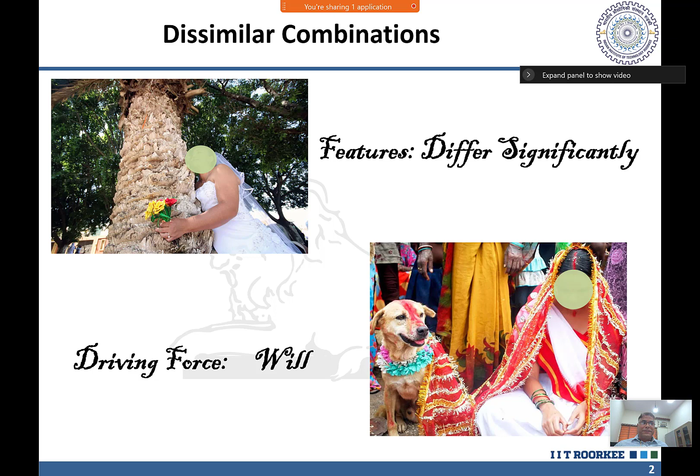A similar situation comes across in our industry, where we have to bring together two different kinds of things which are not compatible with each other. Still, we need to put them together so that we can make systems which are economical, efficient, and which can survive to the design life without failure.

So there are two aspects we can consider. One is the thermal power plant, where we see a lot of dissimilar metal combinations of carbon and alloy steel welded with austenitic stainless steel.

As fuel consumption prices keep rising, efforts are being made by the automotive sector to cut down the weight of automobiles using hybrid materials, wherein alloy steels are joined with a number of other materials, including aluminium. The joining of aluminium and steel is a comparatively newer thing, but it is being done in a lot of latest advanced cars nowadays. The idea is to cut down weight and make the systems more robust, so that fuel consumption, emissions, etc., can be reduced.

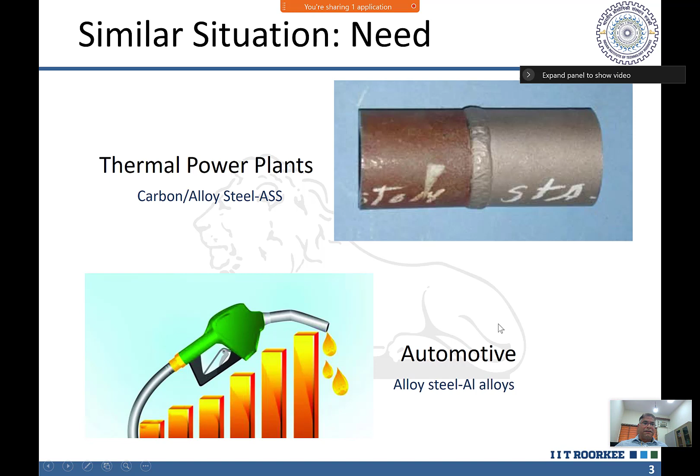When we talk of bringing two different metals together, there are a lot of challenges brought in by the difference in thermophysical properties, especially melting point, thermal expansion coefficient, and thermal conductivity. These three properties bring in an asymmetric weld whenever we apply fusion welding.

The same situation occurs in some solid state joining processes. Similarly, the difference in mechanical properties of the two metals to be joined, in terms of yield strength and ductility, leads to localization of residual stresses, which in turn frequently causes cracking and distortion.

Likewise, the difference in their chemical affinity to gases leads to different compositions, creating different situations that promote defects and discontinuities in the weld joints.

So what we basically want is, ideally, for the two dissimilar metals to be joined without doing anything extra—just put them together. If the joint develops, that's the best situation. But we know that's not workable; it doesn't happen that way.

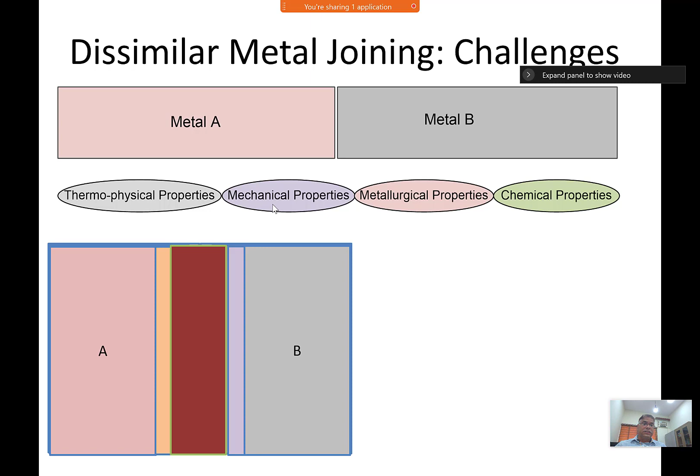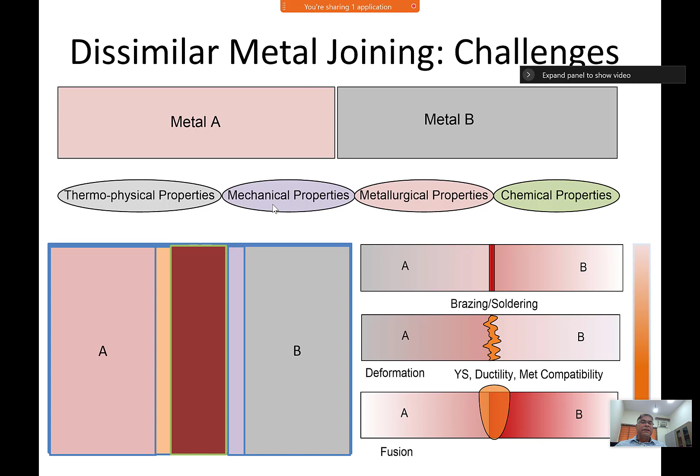Why does this happen? Because as we increase heat input, the two metals, which are not really compatible with each other, create a lot of troubles in both the weld and the heat affected zone.

When this is done, it's a very simple thing to observe—we see an asymmetric weld. The weld is very limited on one side and more on the other side, and this is attributed to the difference in properties of the two metals being joined.

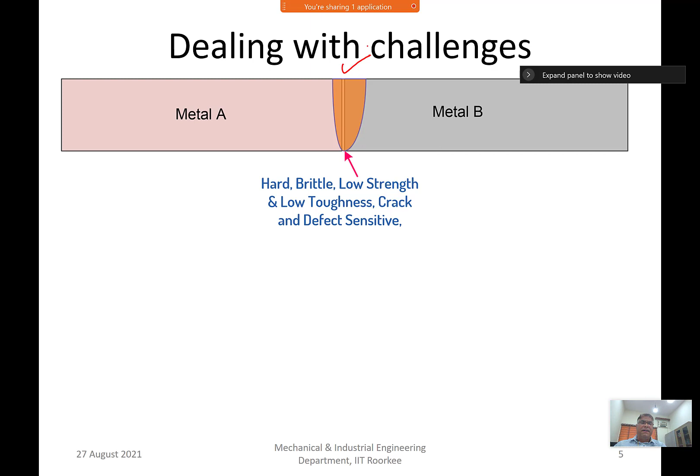When it is done directly, as in autogeneous welding, we see a hard, brittle, low strength, low toughness, crack-sensitive weld is formed. So what we can do is avoid the two meeting too frequently with each other, or reduce their direct connectivity and interaction.

So we have certain ways to address this. One is to reduce the heat input.

Second is minimize the direct interaction between the two. Third is let us increase the compatibility between the two dissimilar or incompatible systems. So for that, we have to reduce the heat input by using high power density processes like laser or electron beam, or pulse GTAW, pulse GMAW, keyhole TIG, CMT, etc. There are certain variations.

Minimizing the interaction is also possible when the two metals being joined are not getting fused with each other, as in solid state joining. There we are reducing the heat input, as well as their direct metallic interaction, since there's no fusion. So that's another alternative way to do this.

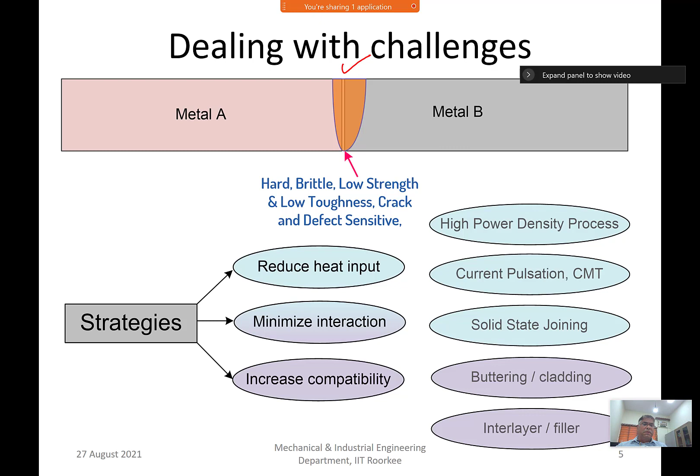Then increasing the compatibility between the two incompatible metals. For that, we try to do buttering or cladding and use interlayers. So that's what we can see in this slide. Here, the two metals A and B are not compatible with each other, so a third metal is brought in which is compatible with both A and B.

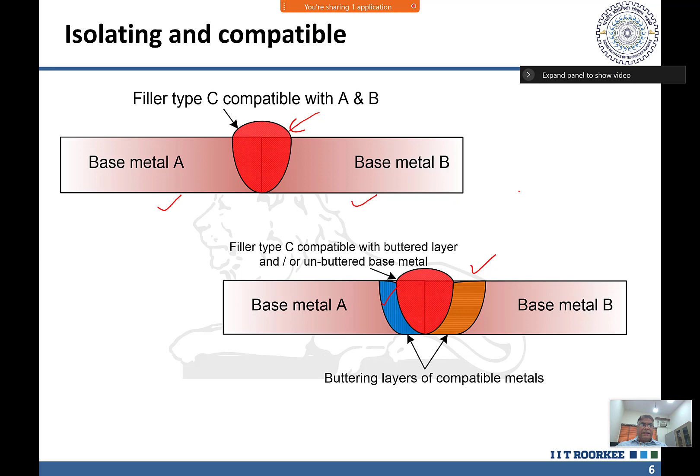But sometimes we come across cases where the filler C and metal A are not compatible, and the filler and the base metal are not compatible. Then we have to bring in more fillers used as buttering layers on both sides. So the idea is we are isolating the two incompatible metals that still need to be joined, or we make them compatible by isolating first and then joining using more compatible metals and filler. You know that the two metals have different physical, mechanical, and chemical properties, so they will not behave in the same manner.

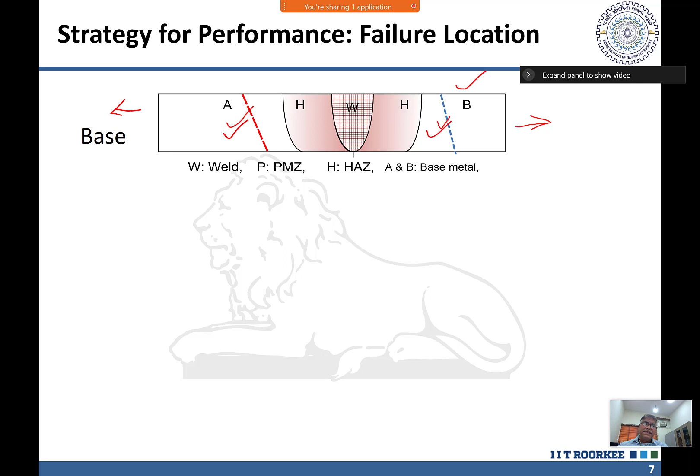How do we check where we should focus so our joint performs effectively during service? Whenever such dissimilar metal joints are developed, we need to check and test them. On testing, we find where the failure is occurring. If it is from metal B, we look into metal B; otherwise we talk about metal A if the failure is occurring there. So the problem is with the base metals, and we work on the base metal aspect.

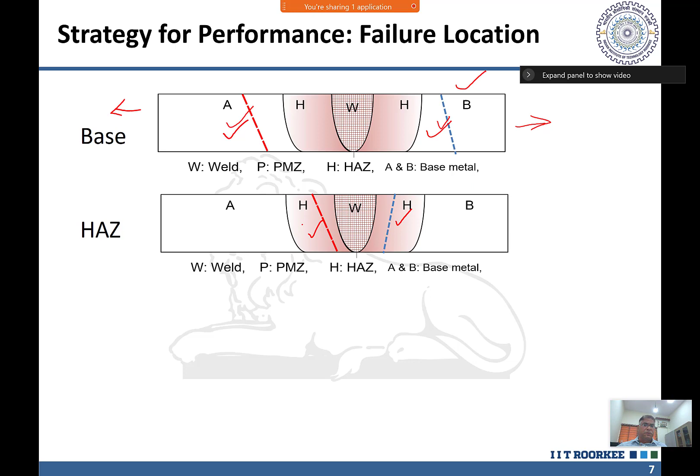If the failure is taking place from the heat affected zone, we need to do something to minimize the heat affected zone or neutralize its negative effects, whether on the B side or A side. This is very common in dissimilar metals. Then there's the interface: whenever the weld is developed, you may find the base metal side A and the weld are not mixing properly, not developing good metallurgical connectivity, forming a weak zone. So there's a possibility that the weld and base metal side A or B can lead to weakness, causing a lot of troubles.

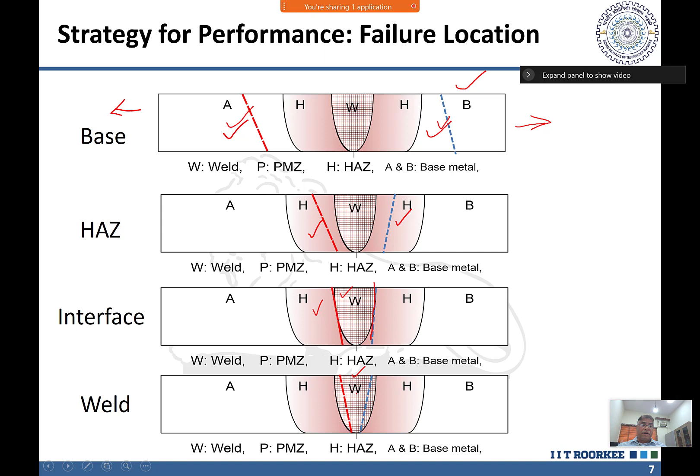Finally, if the failure is from the weld, we can certainly do something. The good point in fusion welding is that we have a lot of options to make the weld metal strong compared to the base metal or heat affected zone. So that becomes the problem as well. The performance of the fusion weld joint, whether similar or dissimilar, depends on soundness. If it is sound, all sound joints will be accepted. Then the weld metal properties and heat affected zone properties, then the metallurgical, mechanical, and residual stresses which are developed.

We have opportunities to alter the properties using a suitable filler, which can be overmatched or undermatched as per the need, in terms of toughness, ductility, hardness, wear resistance, corrosion resistance, whatever is required. But we cannot do anything with the heat affected zone. It is always going to be there, and the heat affected zone is the most troublesome area in welding, including dissimilar metal welding.

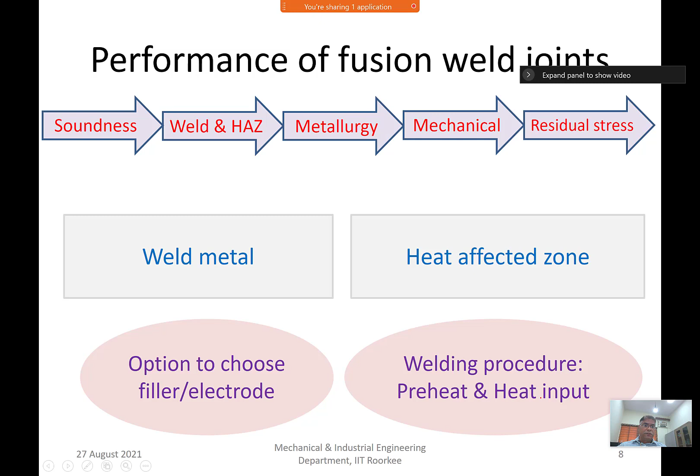But the problems are more actually in dissimilar metal welding. This in turn depends on the preheat and the heat input. Both we want to minimize so that the HAZ size is reduced. This diagram simply shows we need an optimum heat input for developing a sound weld joint, technologically sound, so that it is free from discontinuities.

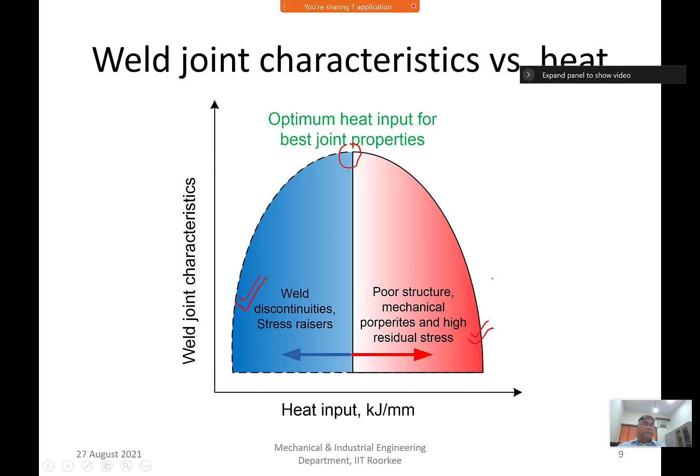When the heat input is very less, there will be a lot of stress raisers and discontinuities. When the heat input is more, there will again be a compromise in terms of the mechanical and metallurgical properties degrading the mechanical performance of the joint. So we need optimum heat input.

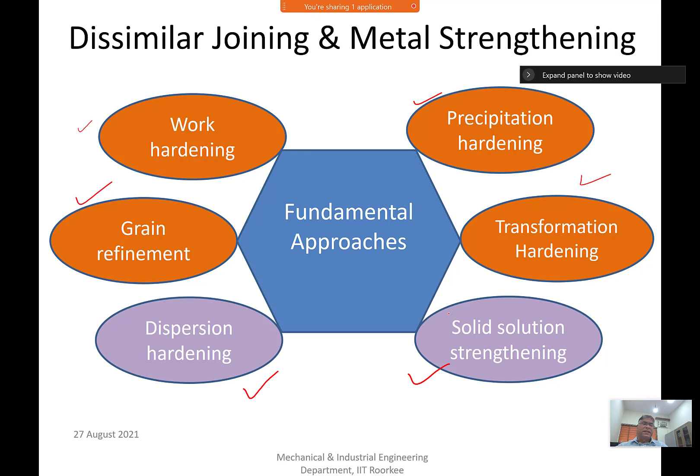Now, to understand how different dissimilar metals will be affected when joined, you have to see that different metals are designed based on different concepts like work hardening, grain refinement, precipitation hardening, and transformation hardening. These highlighted colors are the metal systems designed using these four approaches, and they will be significantly affected by heat. On the other hand, if you see dispersion hardening and solid solution strengthening, metals strengthened by these may not be much affected by heat.

If you take steel in Q&T conditions, it shows a lot of softening in the heat affected zone. Weld may be hard, that's fine. On the other hand, steel in annealed condition shows the weld is harder, then a little softer, then softer like this. So there can be a lot of variation.

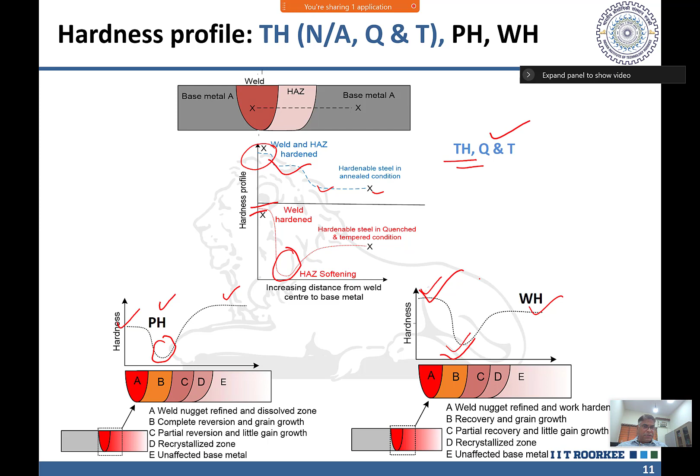If you change the metal and bring in two different metals, precipitation hardenable metals will show a lot of softening, and the weld is also weaker than the base metal. On the other hand, work hardened metals may be stronger than the base metal, while the weld is softer. So the point is, the moment you bring in two different metals and give the same thermal or deformation treatment, they will respond differently, leading to a lot of variation in properties.

So let us take an example of, like, you take the... sure, yeah, okay. So for the dissimilar metal fusion welding, I'll take just 2 minutes. In 2 minutes I will conclude this.

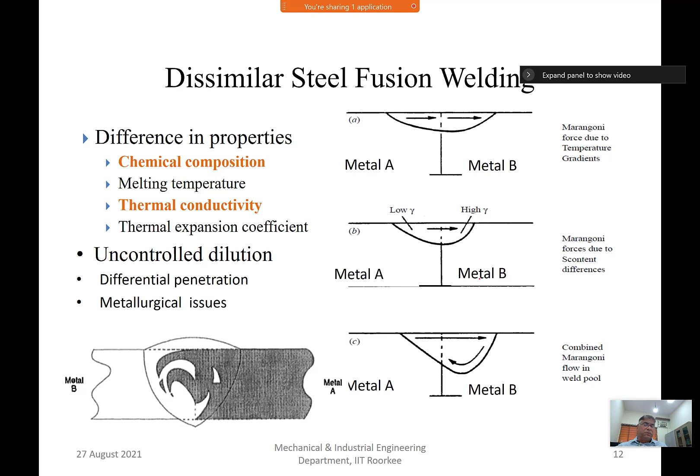In dissimilar fusion welding, because of the difference in the metals, we find the weld metal flowing to this side or that side, leading to a lot of skewedness and asymmetric weld formation, and we get this kind of weld.

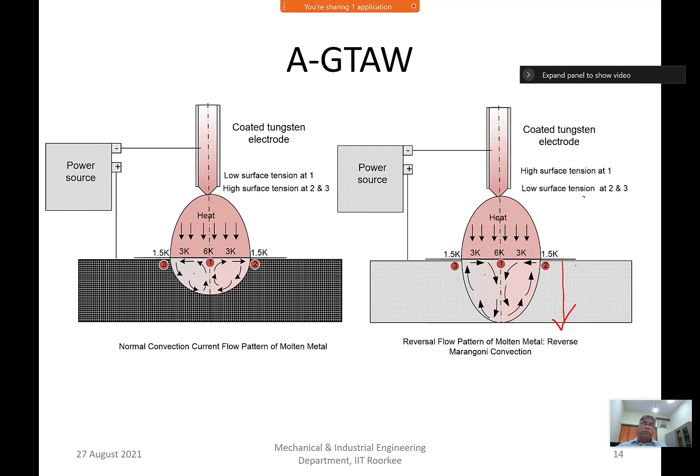Let's take one typical newer development in the GTAW process, where fluxes are used. This resulted in a very deep penetration, high depth to width ratio weld as compared to normal GTAW. Normal GTAW offers 2 to 3 mm penetration, while activated flux GTAW offers penetration up to, even we have welded up to 15 mm using GTAW.

This is the mechanism of how it works. When we use different fluxes, it results in increasing oxygen content in the weld from 20 to say 100, and that in turn leads to increased depth of penetration for the identical width.

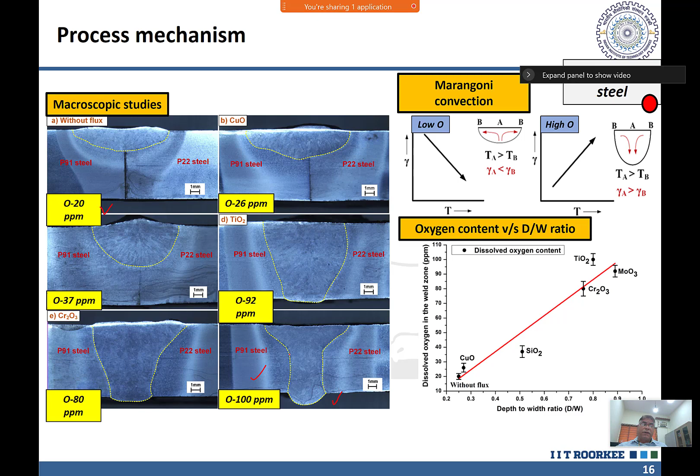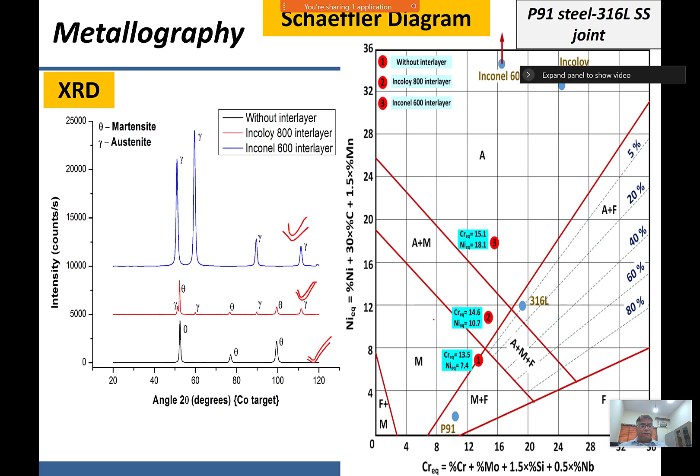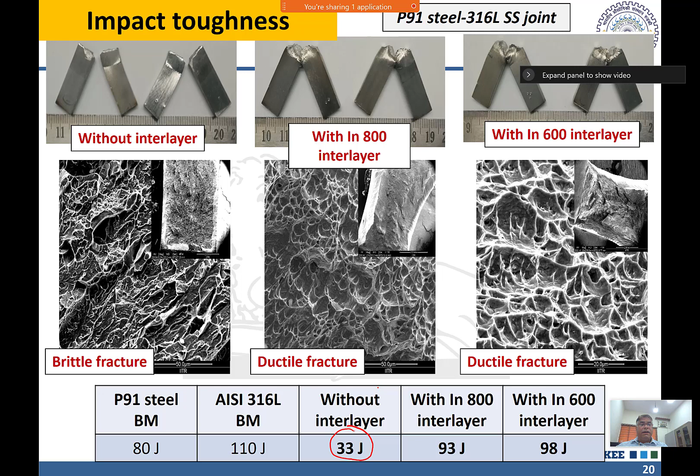We use different interlayers and get different kinds of structures, leading to significant change in properties and performance. Without interlayer, we get a very brittle weld, and when we use interlayers, we get significantly improved weld performance.

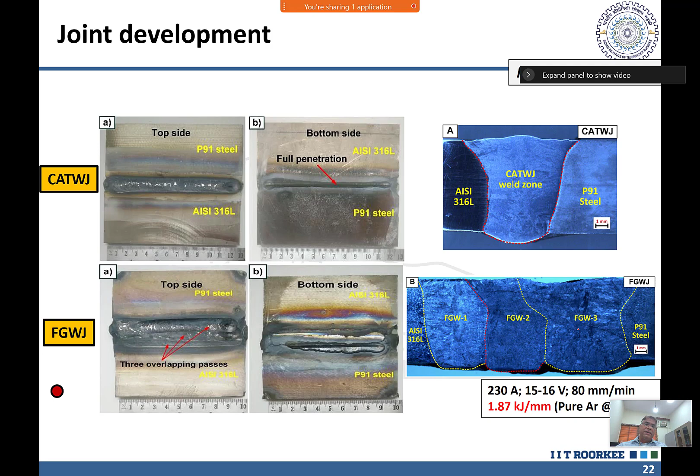We also developed functionally graded weld joints using this approach, which resulted in a lot of improvement in toughness, and also reduced the carbon migration tendency in the development of the weld joint.